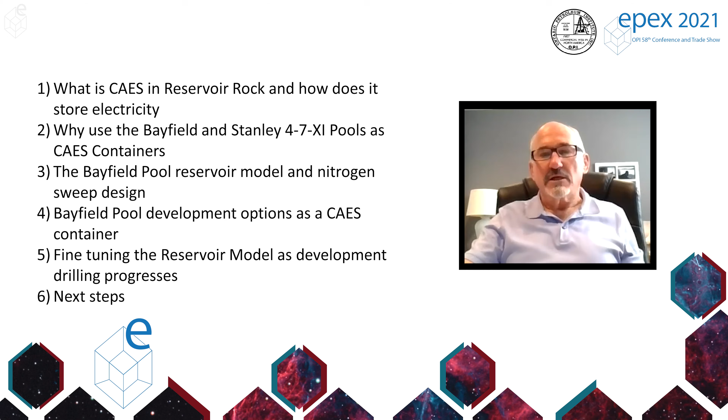The talk will focus on what is compressed air energy storage, specifically the Bayfield Stanley pools, the reservoir model that Bedrock created and used for the nitrogen sweep and for the design of the compressed air facilities, and finalize with some fine tuning and the next steps.

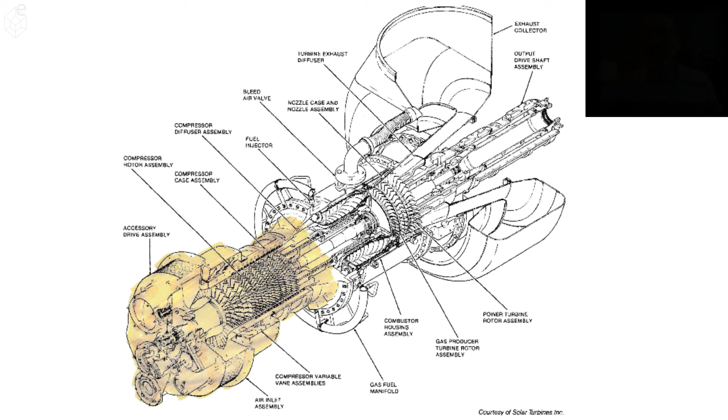This is a picture of a conventional natural gas turbine. This turbine consists of primarily three areas: an air compression area, which is yellowed in this picture, the natural gas combustion area in the center, and then you can see what's called the power blades, which is where all the energy is created. In the case of a compressed air energy storage facility, all the air compression portion of the turbine is decoupled from the rest of the turbine.

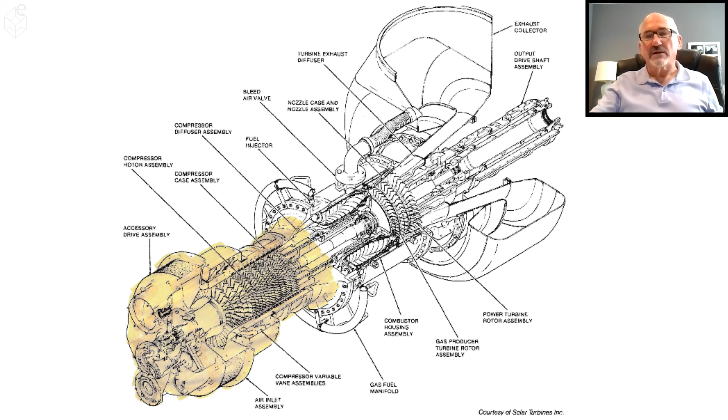In a conventional natural gas turbine, in the range of 40 to 50% of the energy of the natural gas combustion is used to compress the air to stuff into the turbine. In compressed air energy storage, because the air is already compressed and stored someplace off-site, all that power requirement for the turbine itself is saved. So 100% of the energy and heat associated with the air going through the turbine is used to generate power or run the motor, whatever the compressor is doing.

Currently, all operating CAES facilities use underground salt caverns. Notable utility scale ones are located in Germany and also in Alabama. So Bedrock's Bayfield and Stanley compressed air facilities will be the first utility scale and the first overall to be done so in porous rock reservoir.

Just run over the quick advantages and disadvantages of compressed air energy storage in reservoir rock compared to in salt caverns. Especially the Guelph age pinnacle reefs in southwestern Ontario have proven to be ideal natural gas storage containers. They can be delta pressured, which means they're pressured to significantly above their original discovery pressure. You can also put higher temperature air down there.

You don't have the problems with the salt becoming molten and moving like you do if you put high pressure air down a salt cavern. You can also have large temperature swings without degrading the quality of the reservoir, which you may not be able to do with a salt cavern.

The disadvantages are, in most cases, because you're using an existing natural gas pool as your compressed air energy storage container, you've got to get rid of the natural gas out of the pool to start with. So there's work that's done in that. And because your permeability isn't nearly as big as an open hole like a salt cavern is, you need significantly more injection withdrawal wells to be able to handle a pool.

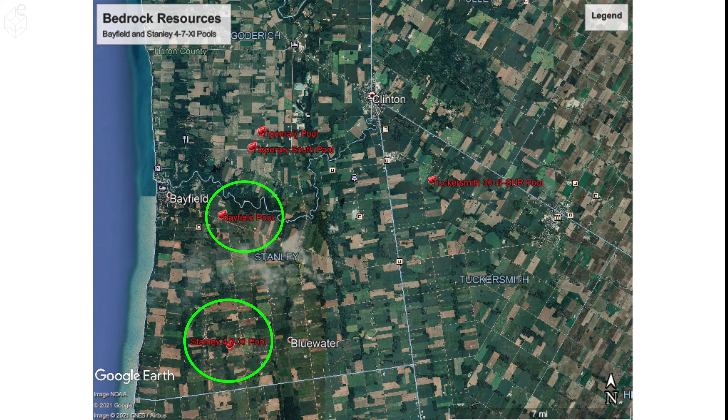We just call it the Stanley pool. Those are the two pools that we're considering to develop. Ontario is a perfect jurisdiction to implement utility-scale energy storage, given the intermittency of our considerable renewable generation fleet, which is often curtailed or exported at a loss to the States, in conjunction with the commissioning and refurbishments taking place with the Bruce Power nuclear facilities, and also the political push for electrification, such as seen with EVs.

Experts predict a 3 to 5 gigawatt supply gap by mid-decade. Bedrock's Bayfield and Stanley facilities can act as solutions to address this supply gap. Both Bayfield and Stanley pools were approved in 2012 to be converted to natural gas storage facilities. And in doing so, that helped characterize the facilities and the reservoirs quite a bit.

Unfortunately, at the time, a long, large diameter pipeline was required from Lobo to Bayfield, which made that project uneconomic. So in 2017, Bedrock sought out these reservoirs and developed a plan to convert them to compressed air energy storage. The pools are at an advantageous location given that they're close to the Seaforth transmission station. There is a 500 kV line not far from the sites, and also they're close to the Bruce facilities and a number of large-scale wind generation sites.

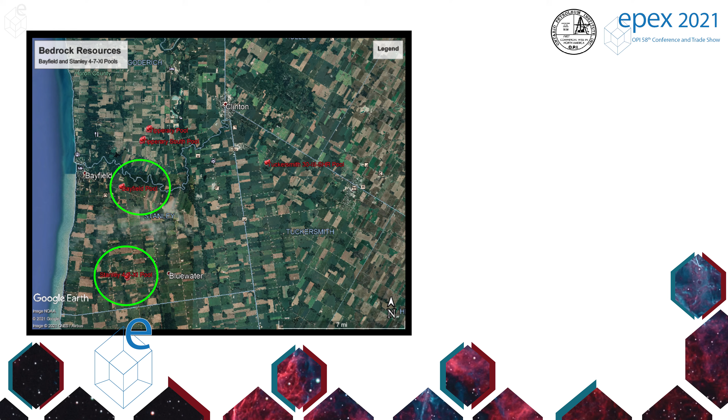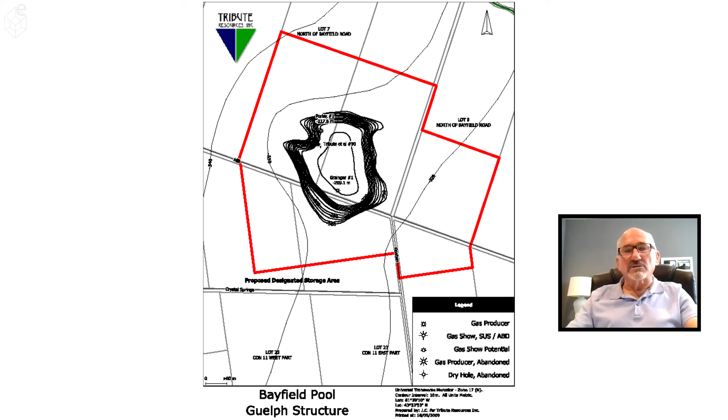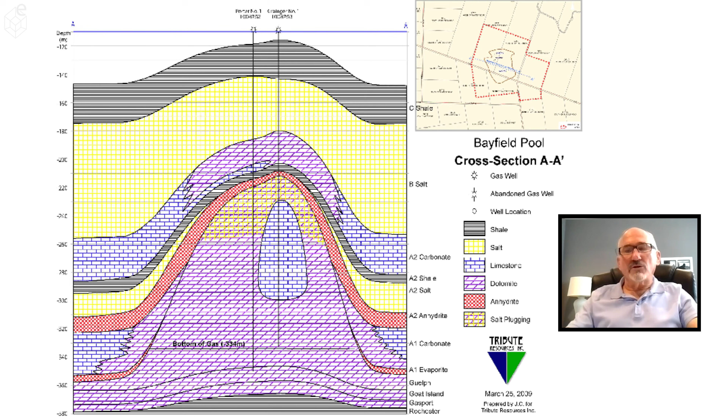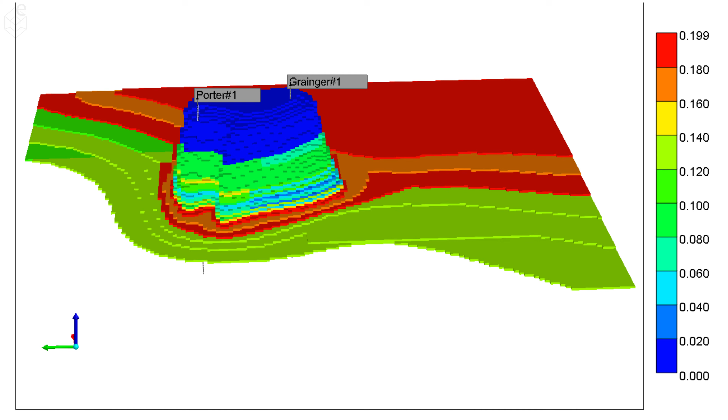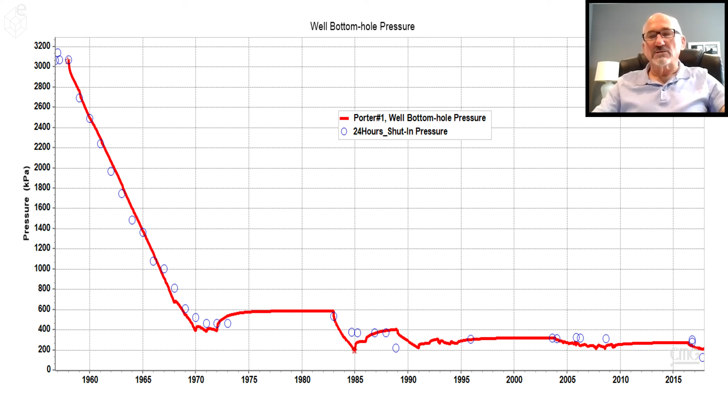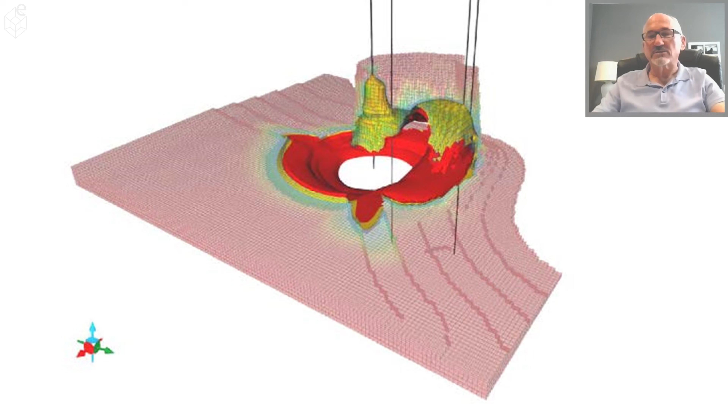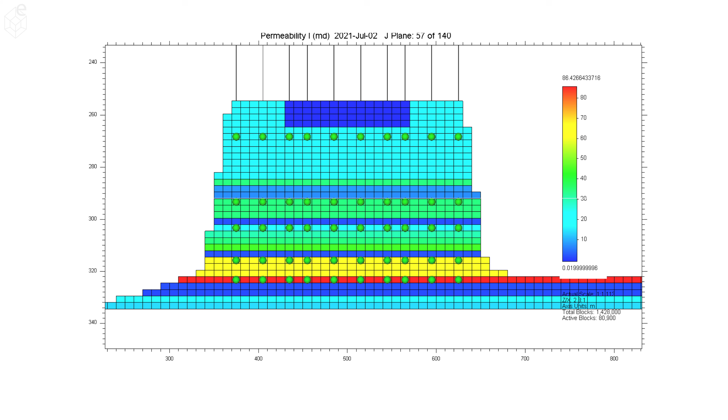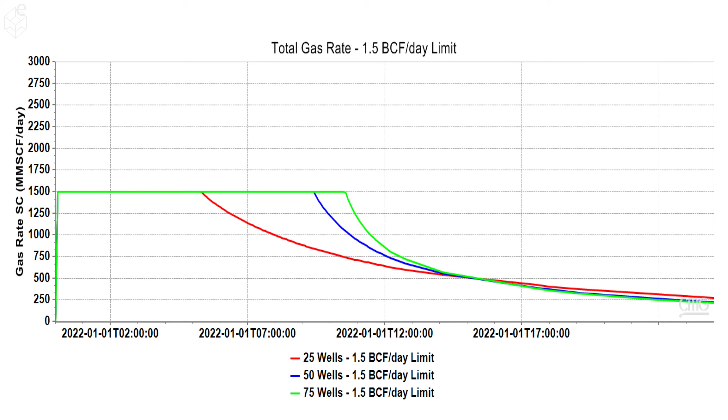Based on that 50 well simulation, we simulated 1.5, 2 or 2.5 BCF a day worth of air withdrawal from this pool to feed the turbine. I'll show you this history match here. The red line was assuming 25 wells had been drilled to develop the pool. The blue line assumed the 50 wells, the one that I just showed above, and the green line showed 75 wells. This particular case was the 1.5 BCF a day air withdrawal rate.

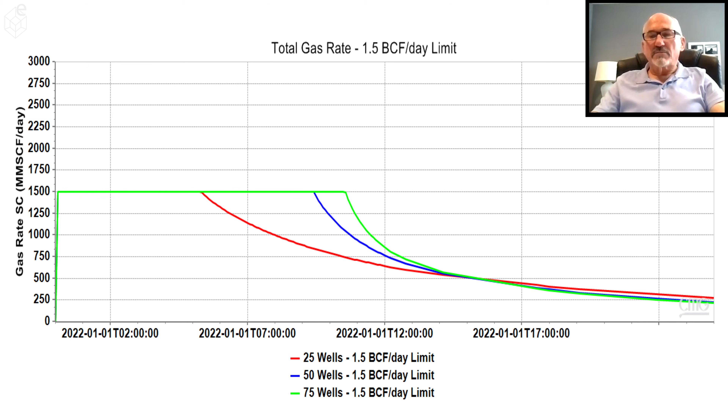So as we start drilling these IW wells, new wells in the pool, every piece of geological information will allow us to go back to our CMG model and fine tune it to make sure it always reflects 100% of the information that we know about the pool. We don't expect it to change very much from what we see now, but it is going to be an evolving case once we get drilling.

So next steps, and I'll pass it back to Stephen. Most of the below ground work is completed in the Bayfield CAES project. We're focusing our attention now on the above ground facilities. This is the compression generation, the utility, gas and electrical connections, and the environmental assessments for the transmission routes to and from. We've been working with the MNRF for a while, and they anticipate proclaiming a regulation on July 1st for the first time ever using CAES in porous rock reservoir in the southwestern Ontario Lockport region.

We also have ongoing discussions with service providers to help determine how much electricity the ISO needs for its grid, hours of day that are best suited to stabilize the grid, and the ancillary services that are in high demand, such as black start, spinning reserve, and voltage control. Bedrock is also looking at other elements to incorporate into the meat and potatoes portion of the project, including thermal energy storage, whereby the heat of compression is utilized on the output cycle to boost capacity, green and blue hydrogen at some point, and also carbon capture and storage.